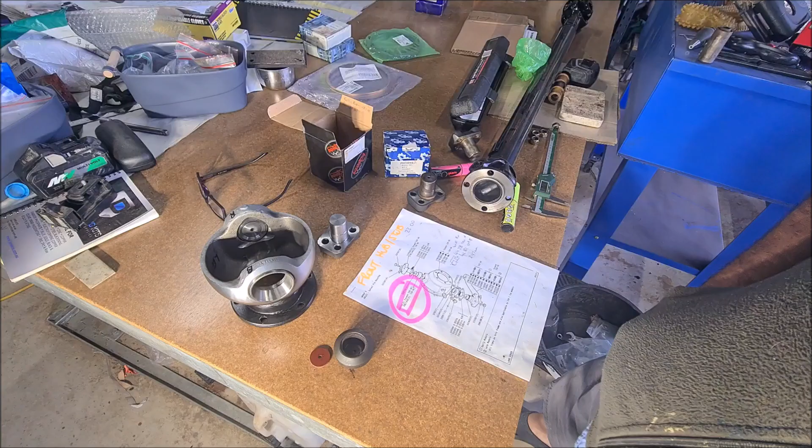Series 3, Stage 1. Railco swivel pin setup.

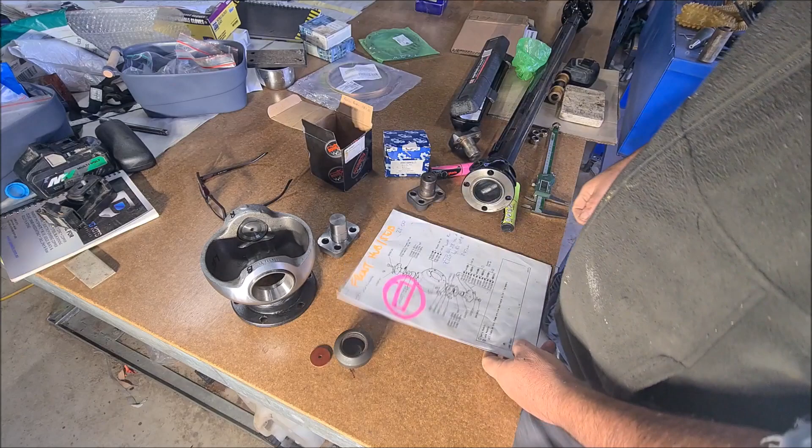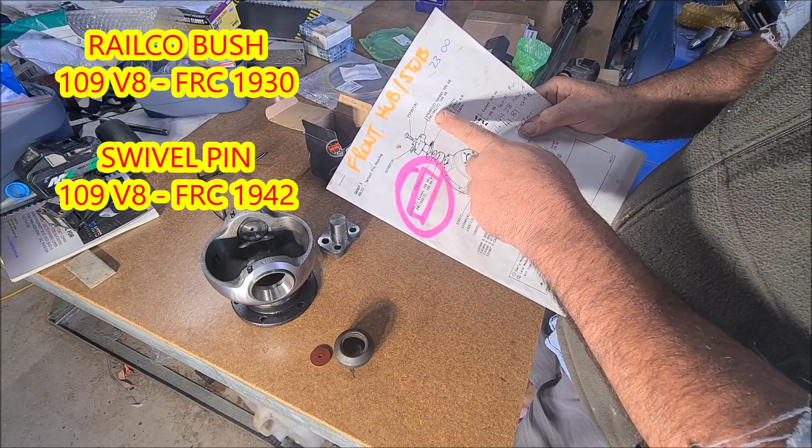So, when I purchased part numbers: Stage 1 Railco FRC 1930, 109 V8, swivel pin FRC 1942, 109 V8, I ordered just that part, each part.

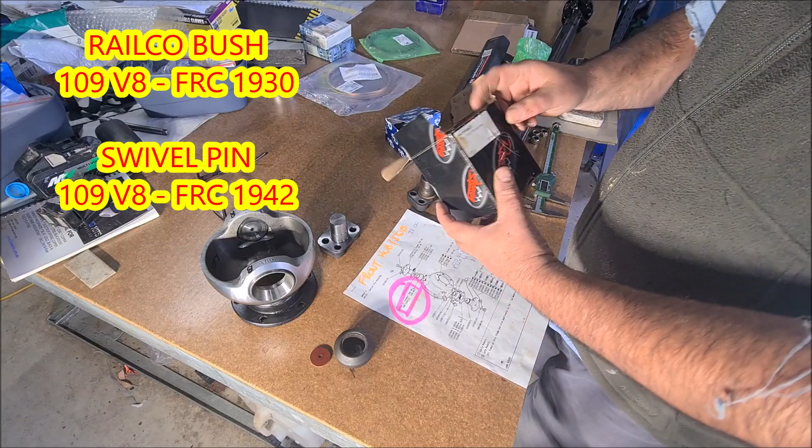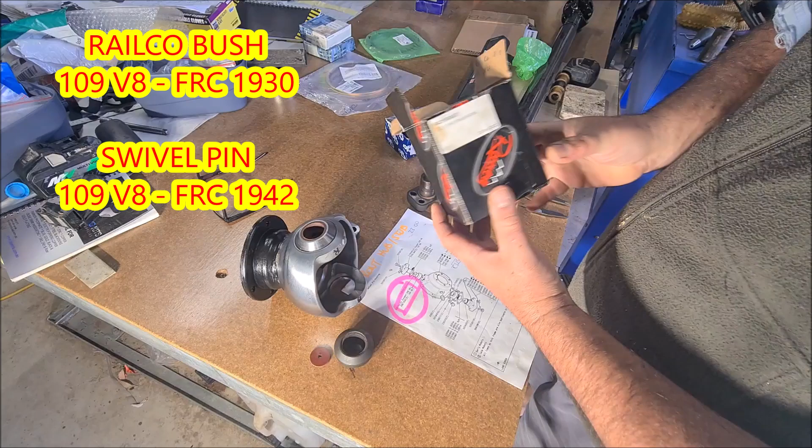Now, the Railco came with the Railco bush, and it also came with a swivel pin and thrust washer. And I also got FRC 1942 swivel pin.

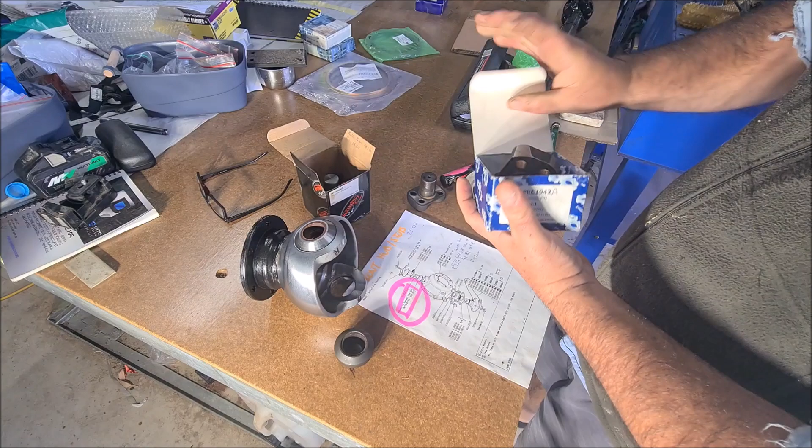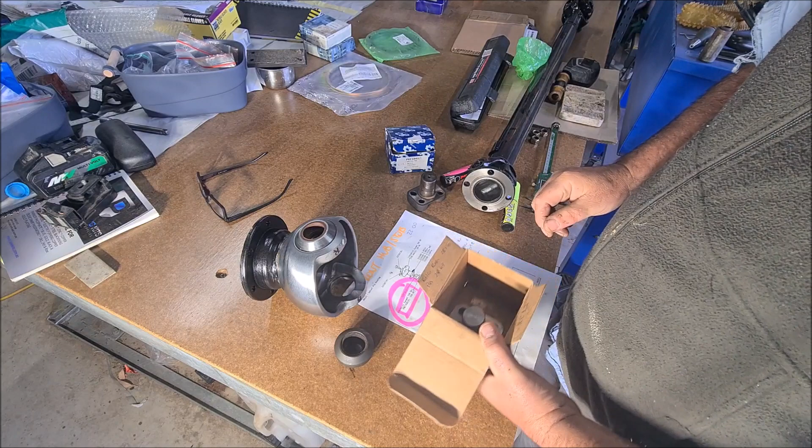Now, in my wisdom, I checked back in the day the diameter, the internal diameter of the Railco and the external diameter of this Railco.

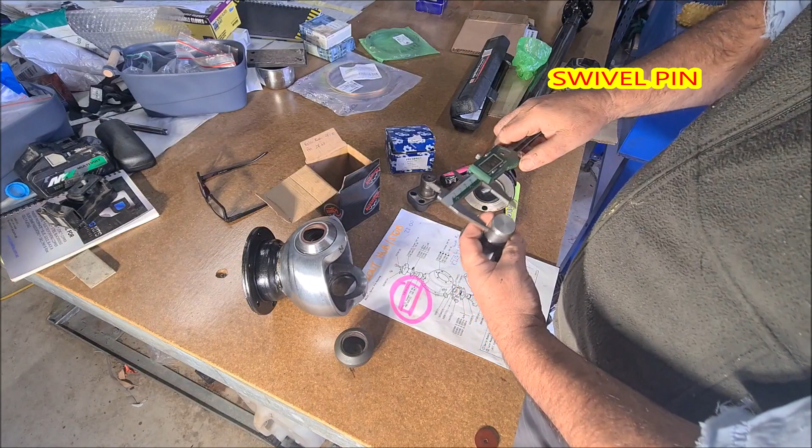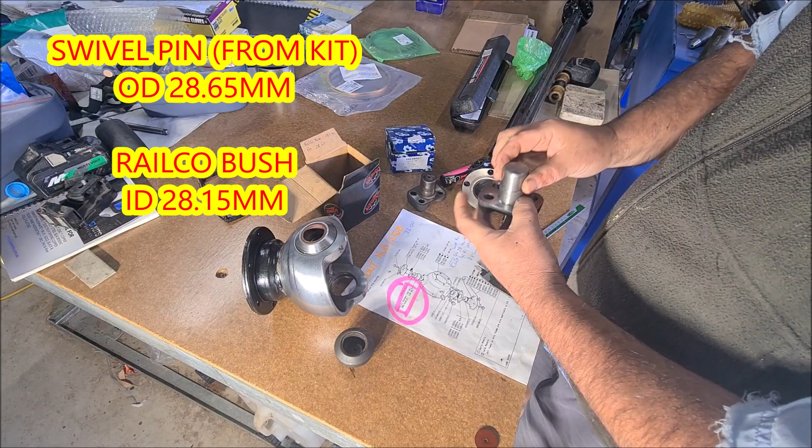that Railco. I rang the supplier and I said, mate, there's no way that this pin that comes in this kit is going to go into that Railco.

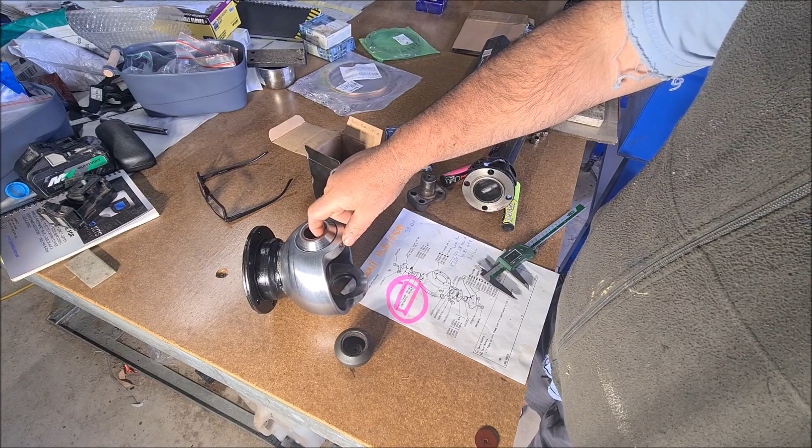And he said, oh yeah, sometimes we machine that internal bush, which is like a Bakelite. There is a word for it, but I don't know.

And I said, well, mate, why? When we're ordering the exact parts, there should be no need. And he said, yeah, that's just what we do. And I said, well, it doesn't really work if someone doesn't have a lathe.

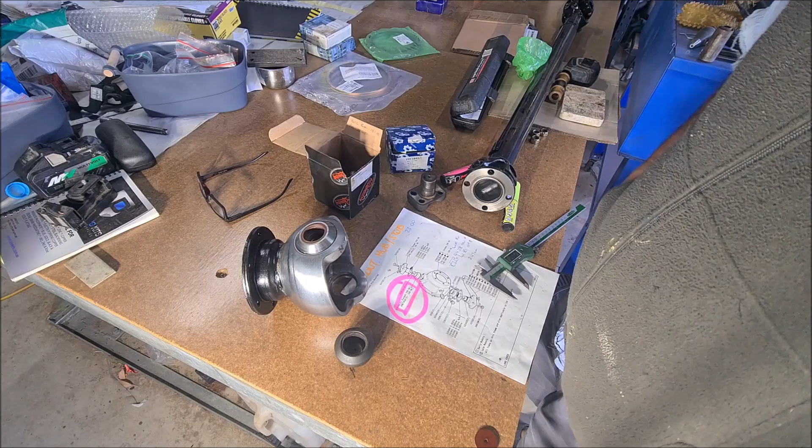So, internal bush, 28.1. This. Swivel pin, FRC 1942. It's 30 mil.

So it's 2 mil greater diameter than that. So there's no way this part, which is as per the book, is going to fit in that Railco, which is the part in the book also. So this is existing Railco

swivel pin. And by all accounts, they just like putting extra holes in these ones. Maybe it costs too much to put the hole.

But these two pins, this is existing. Look, it's worn a bit. So it's 30 mil down the bottom. And it has worn.

Existing swivel pin, existing Railco that come out of that swivel hub. Goes in. But, yeah, flogged out. That's what we're changing it.

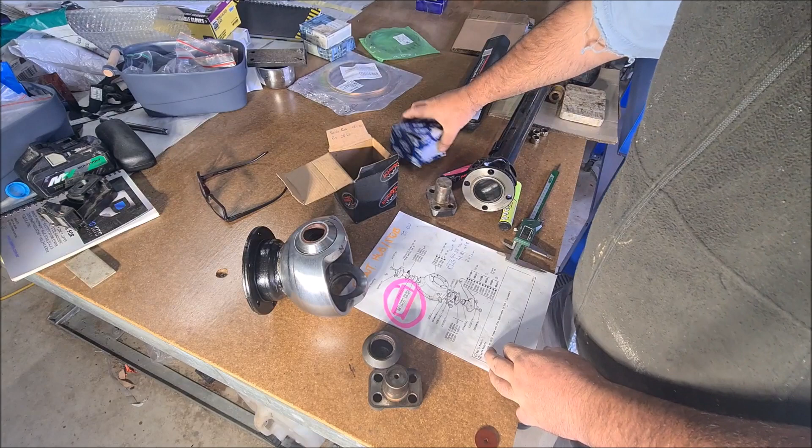So in summary, this Railco swivel pin to suit whatever they gave me in this kit doesn't suit that. And the pin that comes in the kit doesn't fit that either.

So what I've done, I have machined that down to suit that pin. I'm not going to push it in, but it goes in. So I have just skimmed that down with a boring bar in my lathe.

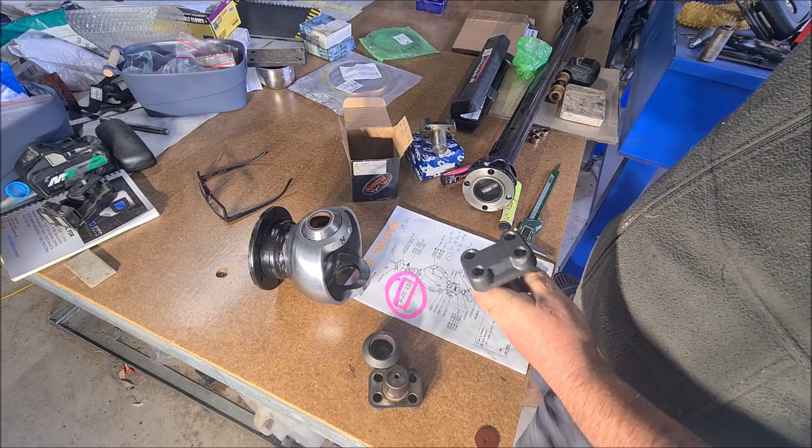So the other day, when I thought, righto, we're good to go, I put the existing shim pack in. Once I had my hub on, put it in. And as I was tightening it up, it was bottoming out, and I couldn't pull up the shims.

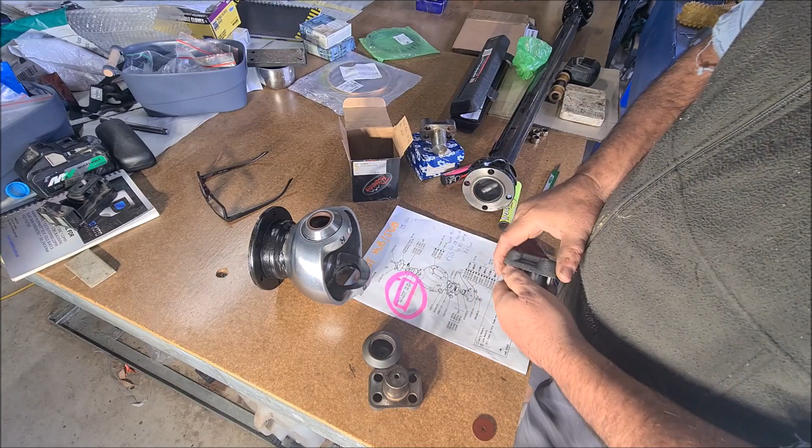Obviously, I had the thrust washer in and all that, but made sure there was only one. So then I measured the length

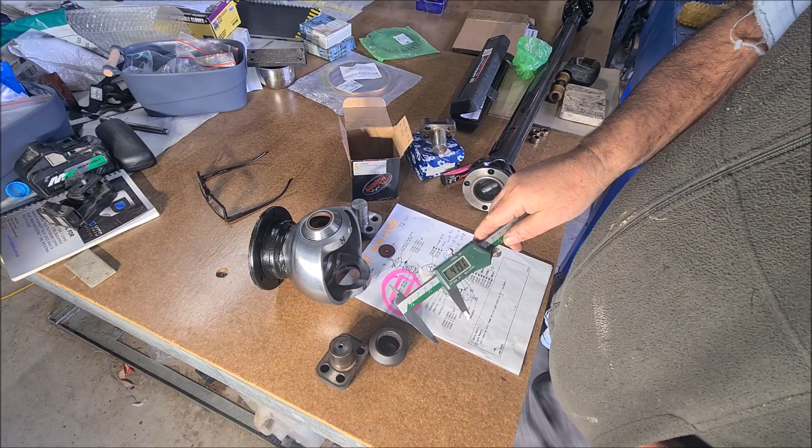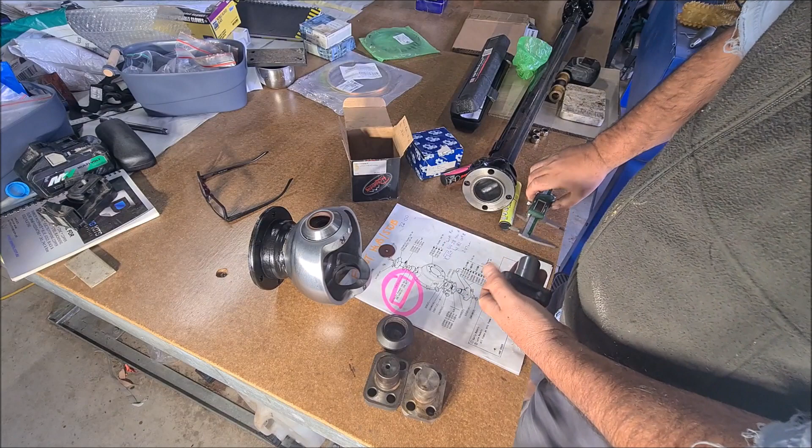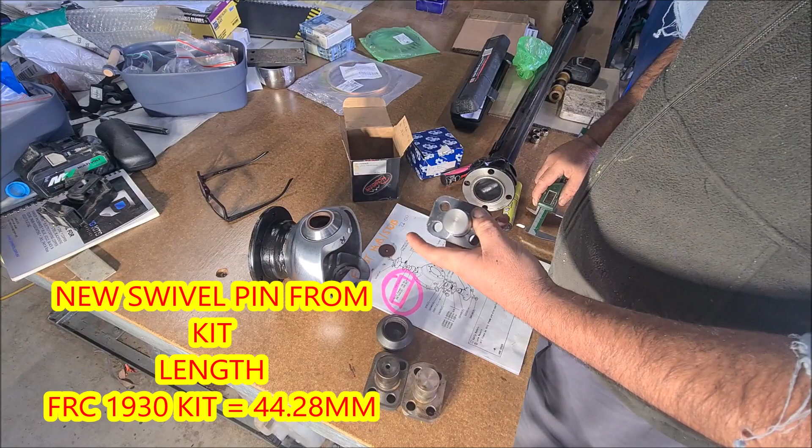So we've established that they are the same pin. When I measured this one, 44.28. I got 44.83 that time, but so this swivel pin is 2.47 mil longer. Some might think that's nothing to worry about, but it's clearly something to worry about.

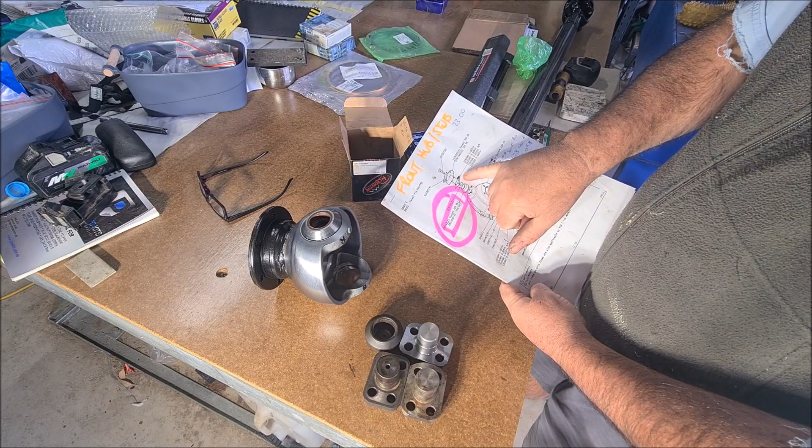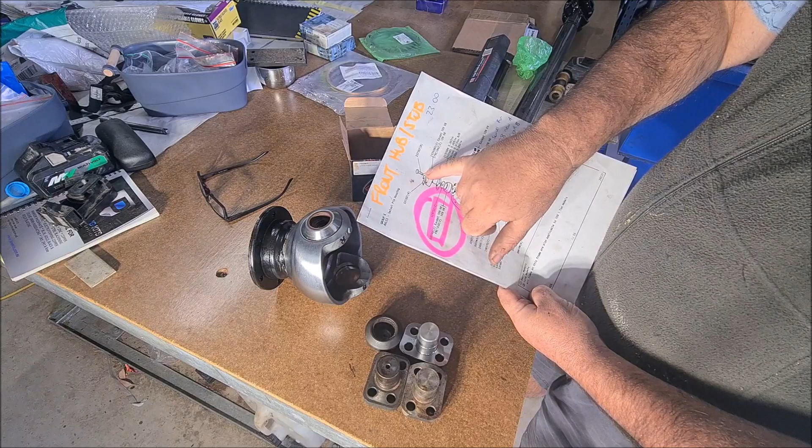So I don't think it's a matter of adding 2.5 more mil of shim pack in there, because I got a feeling that you're going to lose depth on your bolts, on your swivel pin bolts.

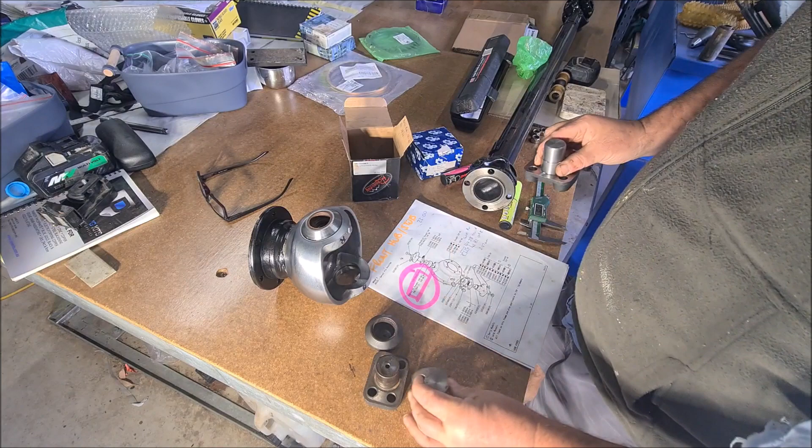Then I was thinking maybe the step is fouling on the top of the Railco, and that's what was stopping it going into that. But as you can see, you put the thrust washer in, put that in. No, it's not.

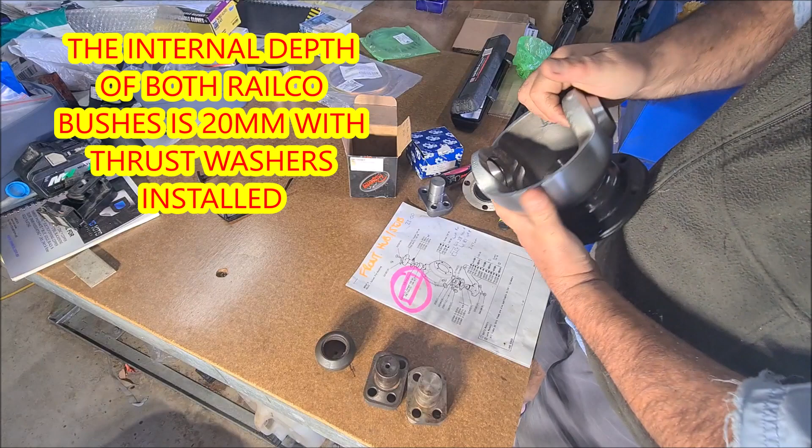So then I was thinking, well, maybe I haven't seated the race in properly or deep enough and the Railco in, but as you can see, that's seated hard and that's seated hard. So that can't be giving you some variation.

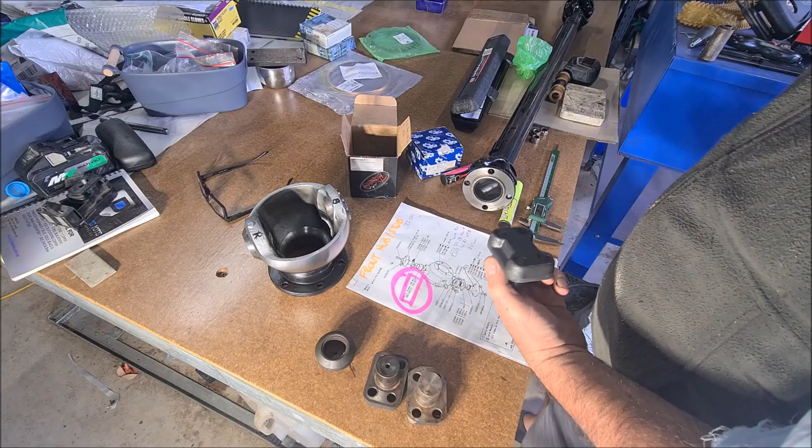So I'm going to machine that down, skim 2.5 or 2.4 mil off into that. And that's what I'm going to do to make it work. But you shouldn't have to do that.

And I would like to know if anyone else has experienced this issue. And I checked some threads on the internet. Yeah, and there are threads saying that there's discrepancies between what swivel pins and Railkos you're getting.

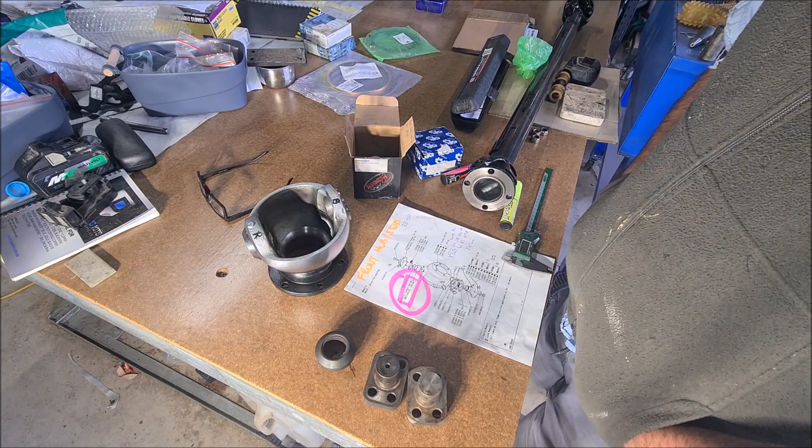So my feeling is that Railko FRC 1930 is not right, because you can see that the thickness of that internal bush in that Railko is nearly double the thickness of the one, and I mean it hasn't worn that much, you know, like it's worn, but clearly not half the thickness of that bush.

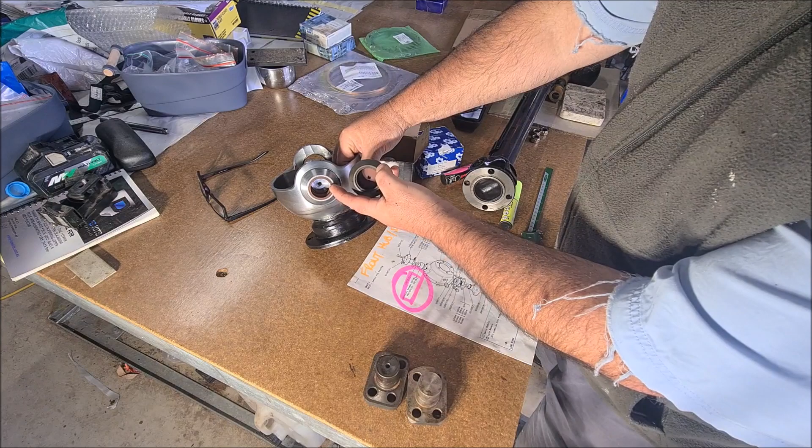So I've got a feeling that Railko is wrong, and who knows what's right and what's wrong in this kit. But anyway, I can't explain it. Hopefully someone out there can.